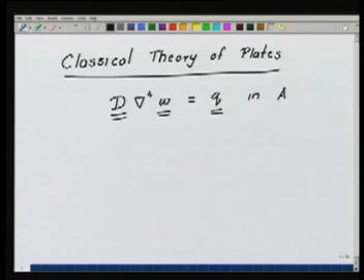In the previous lecture we discussed the classical plate theory as an example of a problem which leads to a fourth order partial differential equation. Working things out, we get an equation in the area A, where W is the transverse deflection, D is the flexural rigidity constant, and Q is the applied distributed load on the top or bottom surfaces of the body. This led to a variational form in terms of the second derivatives of W.

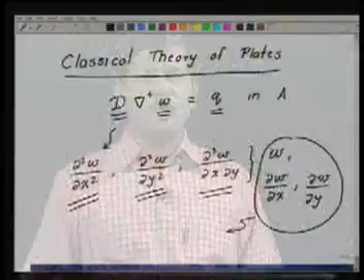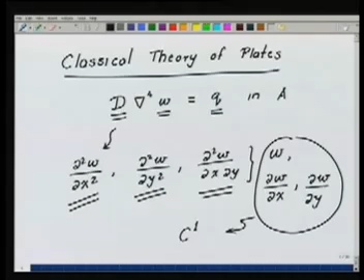Since the variational form was in terms of the second derivatives of W, we require continuity because these derivatives of W have to be defined. So we need continuity of W, del W del X, and del W del Y. This is analogous to what happened in the Euler-Bernoulli beam theory in the 1D case, leading to a C1 continuity requirement in 2 dimensions. We look at certain ways of constructing these C1 continuous elements.

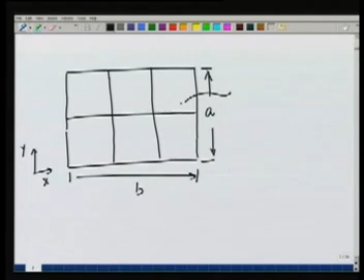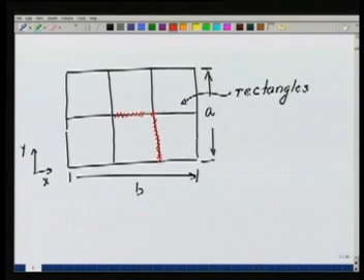One way of doing it: let's say I have a rectangular domain, with a few elements. This is size A, this is size B, and let these be our X and Y directions, so these are all rectangles. What we want is at the interfaces of these rectangles with each other, including the endpoints, we should have continuity of W, del W del X, and del W del Y.

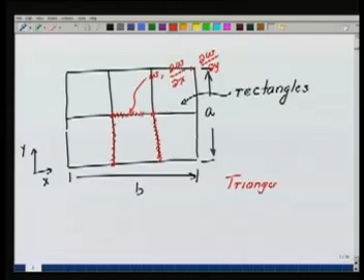If we can construct basis functions which satisfy continuity of these quantities, then we are in good shape. There were several attempts to make such elements, and various versions of triangular and rectangular elements have been reported in the literature. The major problem here is to satisfy these constraints exactly in the general case.

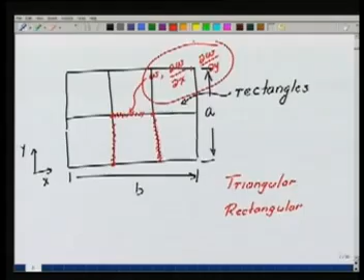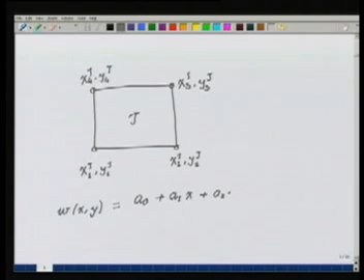Why did I take this whole polynomial? Because if I would like to have continuity of w, del w del x, del w del y at these 4 points of these 4 nodes of the element, I will have to have w, del w del x, del w del y as the variables at each of these nodes.

We will call these quantities: this is essentially theta y, the rotation about the y axis, given by del w del x, and theta x is rotation about the x axis. I am not bothered with positive or negative signs here, that one can find out. This is del w del x, this is del w del y. So these 3 quantities are specified at each of these nodes.

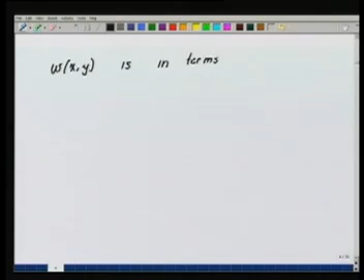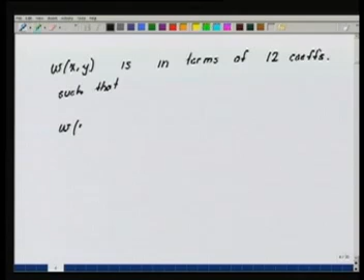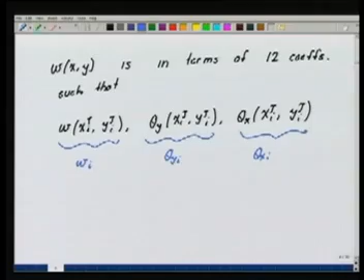x, y in the element is in terms of 12 coefficients, such that the value of this function w at the nodes x tau i, y tau i, then theta y at the node x tau i, y tau i, theta x at the node x tau i, y tau i, which we are going to call by a new name: this I am going to call wi, this is theta yi, this is theta xi. So the values of this function equal the coefficients at these nodes.

So what do we do? We have to have w at xi tau, yi tau is equal to a naught plus a1 xi tau plus a2 yi tau plus up to a11 xi tau yi tau cubed.

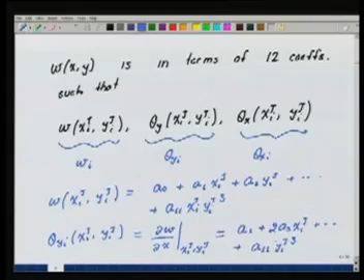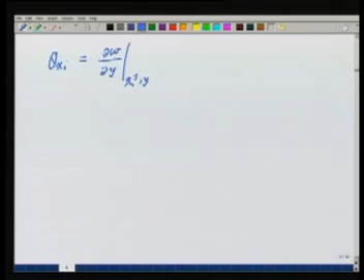Similarly, theta yi at xi tau, yi tau is equal to del w del x at the node xi tau, yi tau. So this would be equal to a1 plus 2 a3 xi tau plus up to a11 yi tau cubed. Similarly, we can give theta xi is equal to del w del y at the node xi tau, yi tau. So this would be equal to a2 plus up to a11 into 3 xi tau yi tau squared.

So we can write theta xi, theta yi and wi at each of these 4 nodes which have coordinates xi tau, yi tau in this expanded form. How many values do we have now? We have 12 values. It's a 12th order, there are 12 terms in this expression.

So now we solve for, so we can write it as this whole thing: wi, w1, theta y1, theta x1, then w2, theta y2, theta x2, up to all the way down to w4, theta y4, theta x4. This is equal to this matrix A into the vector of these coefficients a0 to a11.

What are the entries of this matrix A? It is essentially 1, xi, yi, depending on the expression for theta xi, theta yi and wi in terms of the xi's and yi's. So then this implies we can get a is equal to A inverse into, or I will call it y, where this y is this vector.

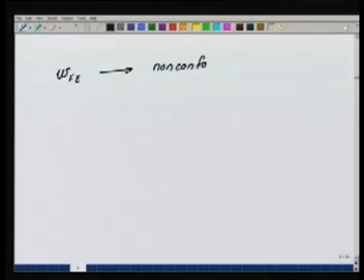So this way we can construct WFE. What will happen is WFE is non-conforming in this case. What do we mean non-conforming? It is that it does not strictly satisfy the constraint of continuity of value and derivative on each of these faces.

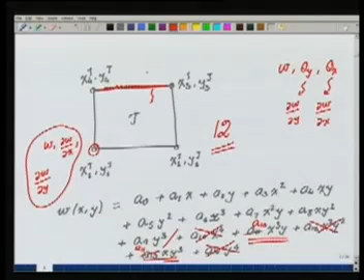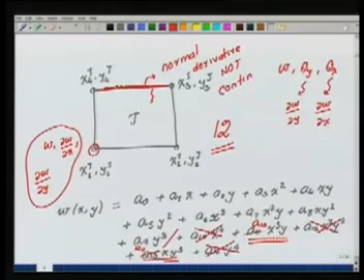So on each of these edges of the element, from this side and from this side, the two elements sharing this edge will have on this edge, as it can be shown, continuity of w and the tangential derivative of w, okay, not the normal derivative. The normal derivative here from the two sides is not continuous. So for example, on this edge, del w del y will not be continuous, but del w del x will be, and w will be.

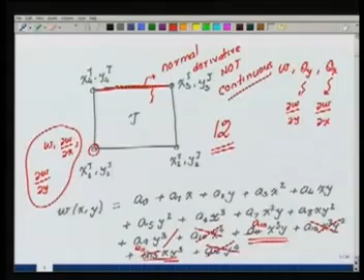So this is a problem because we required our weak solution to have a minimum continuity condition of all these derivatives and w, but we are violating it. Now the question is, because of this violation, does my finite element solution suffer? Answer is yes, but in many cases you get pretty decent solutions and this can be used.

So now the question is, can we improve it? Yes, we can improve it. And where does the improvement come from? So here again is my element.

Okay, now this is the rectangular element. So here, this is essentially the x direction, this is the y direction of the element. So what if in this direction, in the x direction...

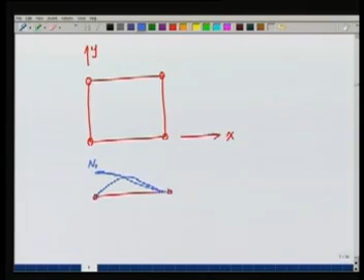I took the Hermite cubic functions as we had created in the case of the beam analysis. So if I take this one, this is what we had as n1 Hermite cubic as a function of x. This one would be n2 Hermite cubic as a function of x.

Similarly, I can create other Hermite cubics. This will be n3 and n4. So this will be n3 Hermite cubic as a function of x, and this will be n4 Hermite cubic as a function of x.

Okay, this Hermite cubic, what does it do? If I have another element here and I have the same Hermite cubic here also, same definition, it ensures continuity of the derivative also in this direction, which is essentially the x derivative, del w del x.

Similarly, I will define now the Hermite cubic with respect to y in this direction. So the Hermite cubic with respect to y would be this function.

These functions, I will call this n1 Hermite cubic with respect to y. This is n2 Hermite cubic with respect to y. This is n3 Hermite cubic with respect to y, and this is n4 Hermite cubic with respect to y. So these are our Hermite cubics: this is n4, n3, n2, and this is n1.

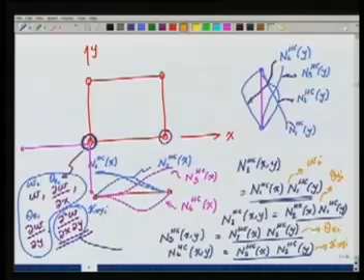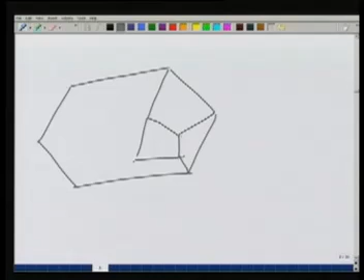It is for you to see whether for this kind of a domain, if I make a mesh of quadrilaterals, somehow I will make the mesh of quadrilaterals, something like this. In this mesh of quadrilaterals, whether these Hermite cubics do satisfy the continuity of the x and y derivative on these faces. If they do, then they are actually conforming in all cases. If they don't, then they are not. But for the rectangular domain, they will satisfy the conforming condition. You check here—this is an assignment problem which you can work out and check.

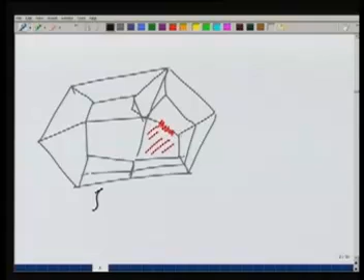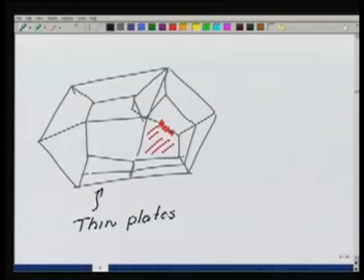Plate theory. Since we are on the topic of plate theories that we have dealt with now, the Kirchhoff plate theory was for very, very thin plates where the shear effects could be neglected. So while on this, let us go a little further. We can have a plate theory which is called the Reissner-Mindlin plate theory, which is an improvement over the plate theory we have discussed, which led to the 4th order differential equation. The idea behind this plate theory is this kind of representation of the displacement field in terms of the transverse coordinate.

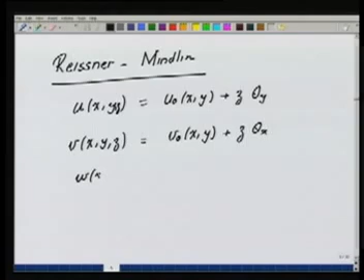So here I will have this as theta y. V(x,y), it should be a function of z also: z is equal to V0(x,y) plus z theta x, and w(x,y,z) remains w(x,y). So what this theory does is it assumes that epsilon zz is still equal to 0. This means gamma xz, gamma yz are constant, while from our standard strength of materials we know that gamma xz and gamma yz are actually parabolic in terms of z. But nevertheless, this is an approximation which is made.

I am not going to delve too much into this plate theory as such, but let's bring out an important aspect of it. What happened in the case of the Kirchhoff plate theory is that we said these things were zero. Because these were zero, theta y and theta x came out as minus del w del x and del w del y. Here, we do not want this to happen—so these are essentially free or independent variables. So in this problem we solve for u naught.

Where is u naught, v naught coming from? If I have in-plane loading. If I don't have in-plane loading, then we can ignore these two parts, where z is with respect to the center line of the plate. So u naught, v naught, w, theta x and theta y—these are the 5 unknown functions that have to be solved for in order to construct the full solution. This is one feature we have for the Reissner-Mindlin plate theory as compared to the Kirchhoff theory, where we only needed to solve for u naught, v naught and w—3 functions.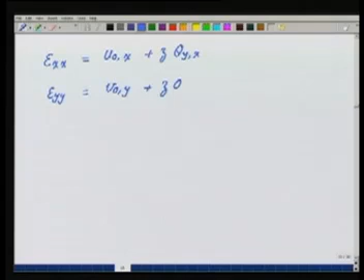If I do this, then let's see—by now you should be able to tell me that Exx is actually equal to u naught,x plus z theta y,x. Eyy is equal to v naught,y plus z theta x,y. Ezz is equal to 0. Gamma xz is equal to w,x plus theta y. Gamma yz is equal to w,y plus theta x. And gamma xy is equal to u naught,y plus v naught,x plus z times theta y,y plus theta x,x.

So this is the state of strain at any point given in terms of u naught, v naught, theta y and theta x, and w. You see that in the strain terms, the first derivatives of w, u naught, v naught and theta x, theta y are sitting—so only first derivatives.

So if I now write the strain energy, that is I write the stress in terms of the strain, the stress will also be in terms of the first derivatives of all these quantities. So the product stress into the strain, sigma xx into Exx, will be in terms of the first derivatives of u naught, v naught and so on.

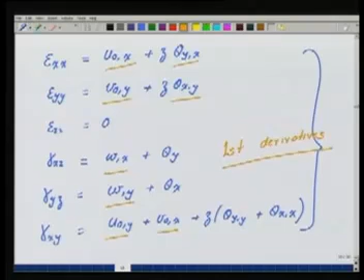So the strain energy definition, as we had written, strain energy is integral over the volume of half of sigma ij Eij dV, with ij going from 1 to 3. This expression would be a product of at most first derivatives of u naught, v naught, w, theta x and theta y. So it's quadratic in terms of the first derivatives of all these unknown functions.

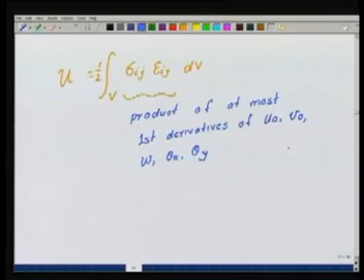So if I look at the strain energy, for the strain energy to be finite, we only want these to be defined. So we only want these first derivatives of u naught, v naught with respect to x and y, theta x, theta y and w, all with respect to x and y, to be defined.

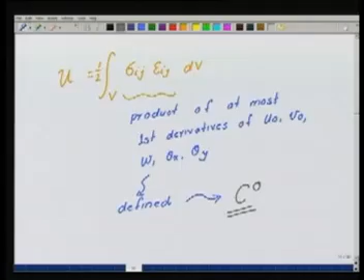Which means that if I want to now construct a basis function to do the approximation, we need to use only C0 elements. That is, I can use the standard C0 elements that we had talked about in a very detailed way earlier when we started the two-dimensional problem.

Those elements, those basis functions, like the linear, quadratic, cubic triangles, the tensor product quadrilaterals, the serendipity quadrilaterals, all those things can be used for the approximation of u0, v0, theta x, theta y and w in terms of x and y.

So then this problem can be solved very easily using the machinery of the shape function generation and integration and all those things that we had developed earlier. So this way we can essentially use the tools available to us in a judicious manner.

This model, it is not to say that this model will do better than the Kirchhoff plate model or it will do worse. This model has its inherent problems which can be corrected to take care of things. One should read the books, and enough material is available.

There are also higher order plate models which go beyond this expression of u in terms of z theta y, z theta x, and you add more terms in terms of higher powers of z. So you would have z squared, you will have some other quantity which is a function of x and y, plus here also z squared more.

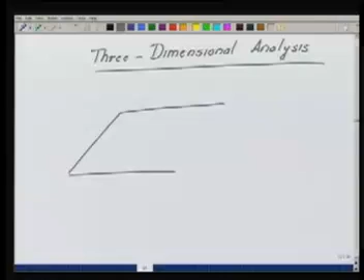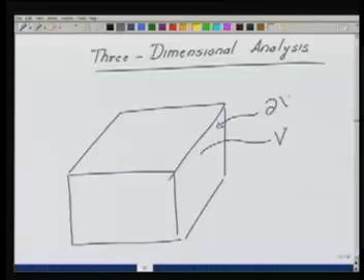Now let's say we have a 3-dimensional domain. I will take a cubical domain for simplicity. Let's say the volume of the domain is V and the surface is given as delta V. Over this domain I would like to find the response of this structure when, on this face I am going to fix my displacement completely, and on this face partially I want to apply a transverse load. You can see that this looks like the bending problem. If it is a long slender member, the beam analysis will be close. If it is flat and both dimensions are similar, plate analysis will do a good job, but that is for you to see. Here we would like to do an honest three-dimensional analysis where the load is applied.

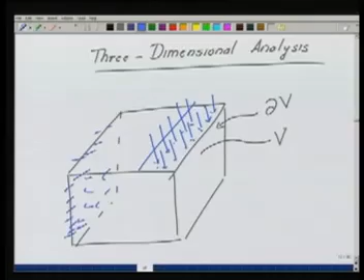Then how do we solve this problem? First of all, we are talking of 3D elasticity as an example of a 3D problem. For 3D elasticity, we would like to develop the variational formulation and then suggest how to create the basis functions or shape functions which can be used to solve the problem.

Some things we should keep in mind before we proceed: here I have deliberately applied the load in only part of the domain. The boundaries now of this three-dimensional domain are surfaces, and we should remember that surfaces will have edges and corners. So these are faces, these are edges, and these are corners.

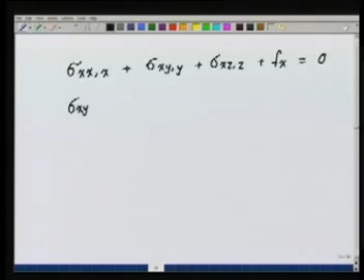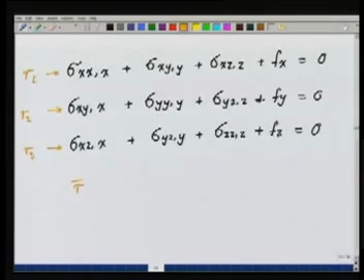So let us write the 3D equation of equilibrium for the theory of elasticity. Sigma xx comma x plus sigma xy comma y plus sigma xz comma z plus fx equals 0. Similarly, sigma xy comma x plus sigma yy comma y plus sigma yz comma z plus fy equals 0. Here I am assuming the stress tensor is symmetric, that is sigma xz equals sigma zx, sigma xy equals sigma yx, and so on. And sigma xz comma x plus sigma yz comma y plus sigma zz comma z plus fz equals 0. Now this quantity I am going to call my R1, this is my R2, this is my R3 - these are components of the residue vector.

As we had done in the two-dimensional case, let us take W with components W1, W2, W3 as an admissible virtual displacement, while we will have the vector u with components u1, u2, u3, where each of these components u1, u2, u3, w1, w2, w3 are functions of x, y, z. This is the unknown displacement field.

So what we had done earlier is take the weighted residual formulation: take R dotted with W and integrate it over the volume. Because R was 0, this will come out to be 0, against any W where W is any admissible virtual displacement. Admissible means it should satisfy the geometric constraints wherever U is specified. Let me jump ahead and say what we want our W to do in the standard situation - we have not yet done integration by parts - is that W should satisfy the constraints, this one and this one. But let us see what happens.

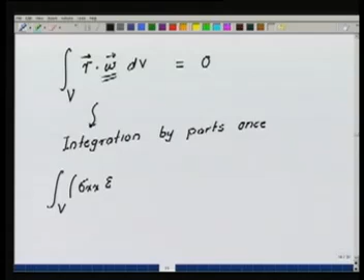Then out of this, I am not going to write the long expression, I will do integration by parts once. By doing integration by parts, I will end up getting this expression: sigma xx into Exx due to W plus sigma yy into Eyy due to W plus sigma zz into Ezz due to W plus sigma xz gamma xz due to W plus sigma yz gamma yz due to W plus sigma xy gamma xy due to W. This whole thing dV will be equal to F1 W1 plus F2 W2 plus F3 W3 plus integral over delta V.

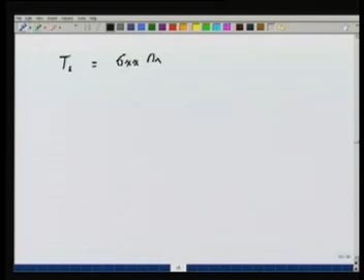I will explain what this is: traction vector T dotted with W dA. So this is what we mean by traction T. What is traction T given as? If you remember, T1 is equal to sigma xx nx plus sigma xy ny plus sigma xz nz.

T1 is the component of the traction vector in the x direction, T2 is the component in the y direction. This will be sigma xy nx plus sigma yy ny plus sigma yz nz, and T3 is equal to sigma xz nx plus sigma yz ny plus sigma zz nz.

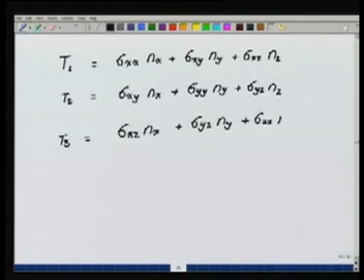This is standard. If you do this integration by parts and use the Gauss-Green divergence theorem, you will get this in terms of that expression. Now you see what are these nx, ny, nz? These are the components of the unit outward normal on the area.

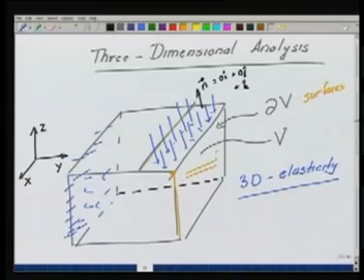So here let us come back to our problem. The unit outward normal is the vector n here. In this case, since these are all parallel, n will be equal to 0i plus 0j plus k. So it has only the component nz which is equal to 1 on this face. But in the general inclined face, you will have all the three components nx, ny and nz of n.

So now where does T become non-zero? Only on this part of the boundary area. And in this case your T1 is 0 because I have drawn these as vertical forces, T2 is 0. Here the vector T is equal to minus T3 E3, the unit vector in the third direction. So I will put this expression for T in the expression here, and I will essentially go ahead from here.

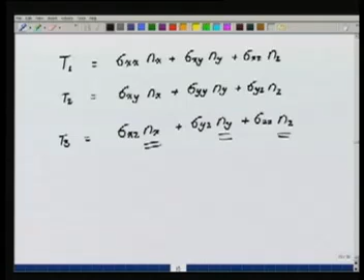Now coming back to what we had drawn there, when I have done the weak formulation, the one I had written, the last expression is the weak formulation. The weak formulation tells us that sigma xx due to u and Exx due to w, and so on, have to be defined in order for this integral on the left hand side to be finite, which means sigma xx is in terms of the first derivative of u and first derivative of v and so on.

Similarly for Ex, Ey and so on, these are all in terms of the first derivatives of u, v and w with respect to x, y, z. So our weak form now requires only the first derivatives of the vectors u, v and w to be defined, which means that as far as the approximation is concerned, we need to construct a C0 approximation in 3 dimensions.

That is, we only want the value of these functions u1, u2, u3, and similarly for the test function w1, w2, w3, which is the virtual displacement, to be continuous. Derivatives need only be defined. So how do we define now continuous shape functions?

First of all, how do we discretize the domain? Let us take our domain of the previous figure and let us make a mesh here. So how will I make the mesh? For the mesh, I have to honor the boundaries of the load profile, boundaries of material differences. So wherever my material has a change, that boundary should have the nodes and the edges and the vertices, nodes and faces of elements sitting there.

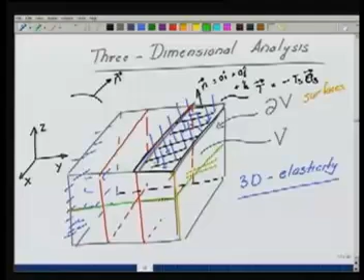What kind of element should I make? In this case, life is a little simpler. So I will make this kind of a partition. Very simple partition, you see. I will make it with a different color so that you can see the effect. Similarly, in the third direction, I will make the partitions like this.

So if you see what we have done, we have constructed elements which are actually cubical in shape, elements which are cubical in shapes. Well, the sides could have different lengths. So these are called, in the language of finite elements, brick elements. There are other types of elements we can make, but I am not going to discuss them here. So this is a brick element.

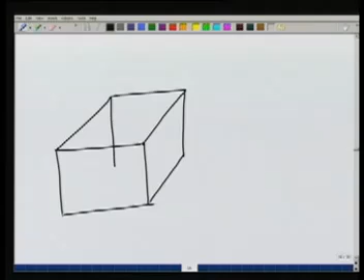So let's do a very simple job of constructing finite element basis functions, or here we will only concentrate on the element. So the shape functions which are C0 continuous now for the brick element. Let's say my coordinate system is, this is x, this is y, this is z. I'll call this for the element, let's say this is my generic element.

This is my generic element tau. This is node 1 of the element tau, node 2, node 3, node 4, node 5, 6, 7 and 8. So this will have coordinates x1 tau, y1 tau, and z1 tau. Similarly, all the other nodes.

So the mapping, now we will take this and go straight to the master element. This will map to a master element which is a master cube. So we make a master cube like this.

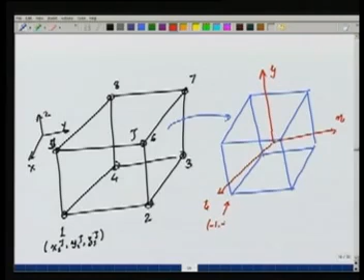This will be my psi direction, this will be my eta direction, and this will be my zeta direction, such that this point is at psi, eta, zeta minus 1. This point is at psi, zeta, eta 1.

Just like we had the 1D master element, then the 2D master element, now we have the 3D master element. So this point will have essentially psi, your zeta will be 1, psi will be... sorry, I have made a mistake.

So this will be: psi will be plus 1, zeta will be minus 1, eta will be minus 1. So this will be plus 1. So here my psi will be minus 1, zeta will be minus 1, eta will be minus 1, and zeta will be plus 1. This way we can construct the 8 nodes.

Now we want to define the basis functions or shape functions with respect to these master nodes, such that the shape function defined with respect to this node is 1 here, and 0 at all other master nodes. How do we define this?

Very simple. We now take the tensor product of the 1D shape functions we had created, the C0 shape functions, in the 3 directions. So n1 hat as a function of psi, eta, zeta will be equal to n1 double hat with respect to psi, n1 double hat with respect to eta, n1 double hat with respect to zeta, and so on.

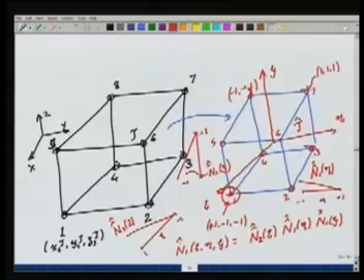This way, putting them together, we can construct the global basis functions. Remember that the basis functions will be formed by piecing together these shape functions from all the elements which share this node, and then we can construct the 3-dimensional finite element solution for each of the components u1, u2, and u3, solved using the weak formulation we have done. We are now in a position to solve the 3-dimensional problem.

But remember that applying the boundary conditions here is a bit tricky, because now we have to do the integral of the given loads over the area of the faces.

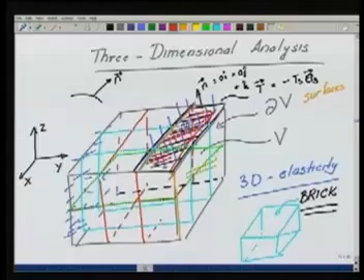In general, for general 3-dimensional domains, defining the domain, meshing the surface, and meshing the interior of the domain is not such an easy job, and for that you need sophisticated mesh generators to construct the mesh on the outer surface and the internal volume.

With this, I will stop my brief foray into the 3-dimensional problem, before which we discussed the plate problem, which was essentially in between the 2D and 3D problems. Before that, we talked of the honest 2D problem—the planar stress and planar strain problems—as well as the 1-dimensional heat conduction problem.

Next, we are going to develop methods for a different class of problems relating to eigenvalue problems at the continuum level—for example, the free vibration analysis or the buckling analysis. How do we solve those problems using the finite element method?